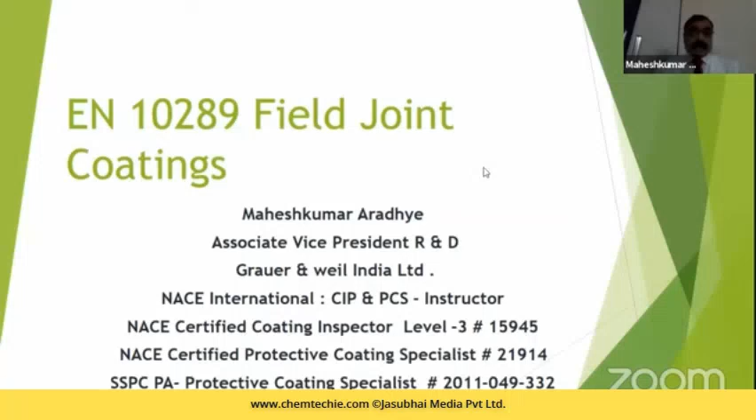maximum benefit. So let's understand in detail what ISO EN 10289 is: a specification for steel tubes and fittings for onshore and offshore pipelines.

This is specifically talking about external liquid applied epoxy and epoxy modified coatings. It's an English version of DIN EN

10289 2004, and it specifically talks about pipeline external field joint coatings.

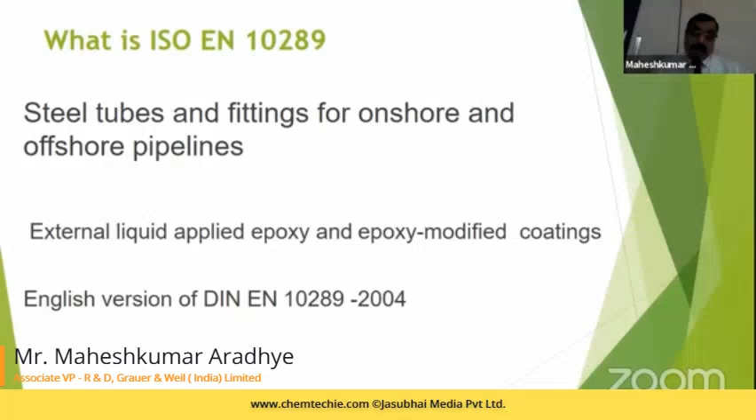When we want to talk about it, it has three different types: type 1, type 2, and type 3. Type 1 coatings are suitable up to 40 degrees C, from minus 20 degrees C to 40 degrees C.

The next, type 2, is minus 20 degrees C to 60 degrees C.

And last but not the least, type 3, which is from minus 20 degrees C to 80 degrees C of temperature. This is the design temperature as well as the actual or service temperature.

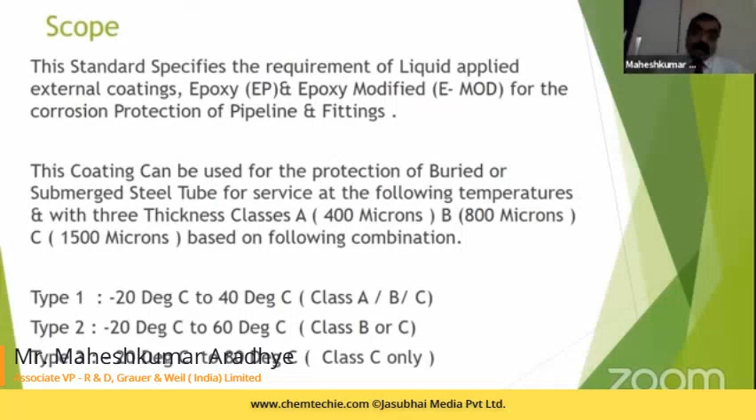These are classified in class A, B, and C. What do classes A, B, C mean? Class A calls for coating thickness up to 400 microns, class B calls for 800 microns, and class C calls for

1500 microns. The most critical parameter here is the hardness of the coating, which should be minimum 80 at that class.

You can get a hardness of say 80 at 250 microns, but that is not acceptable.

It is talking about getting the Shore hardness of minimum 80 at 1500 microns, 800 microns, or 400 microns, whenever the coating is applicable to class A, B, or C.

Now this is one of the very critical parameters. The other parameter is the holiday test.

As a rule of thumb, in normal circumstances, it is said that whenever you go

for application of holiday detection for any protective coating applied onto the surface, it is 4 volts per micron.

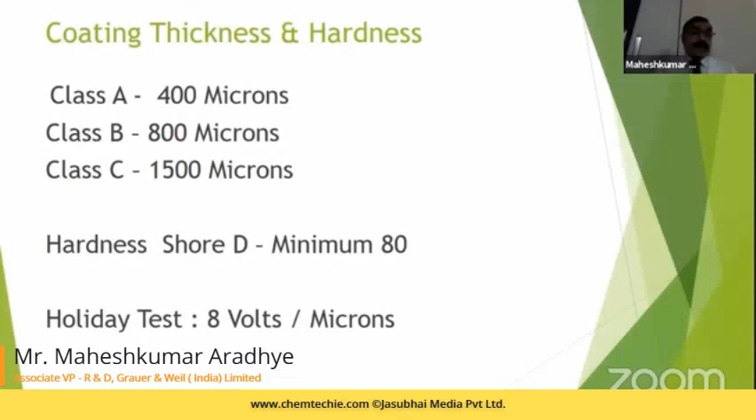Now another critical parameter is the cathodic disbondment test, which is to be carried out at the service temperature. It is not only at room temperature, but also at the service temperature.

As I already discussed, high voltage holiday detection is at 8 volts per micron.

The thermal aging, a great thermal aging cycle at 100 degrees plus or minus 2 degrees centigrade, is for 100 days. The electrical insulation

talks about surface resistance, which should always be greater than 10 raised to 4 ohms per square centimeter, which is very, very high.

It talks about the indentation requirement, which should be less than 30%. Again, this is at the service temperature, not at room temperature.

At service temperature, the indentation should be less than 30%, which is a very, very crucial requirement.

The impact resistance is again more than 5 joules.

Now, if you look at all these test parameters, the coating which you design should meet all these requirements, which clearly shows it needs a very high degree of electrical insulation.

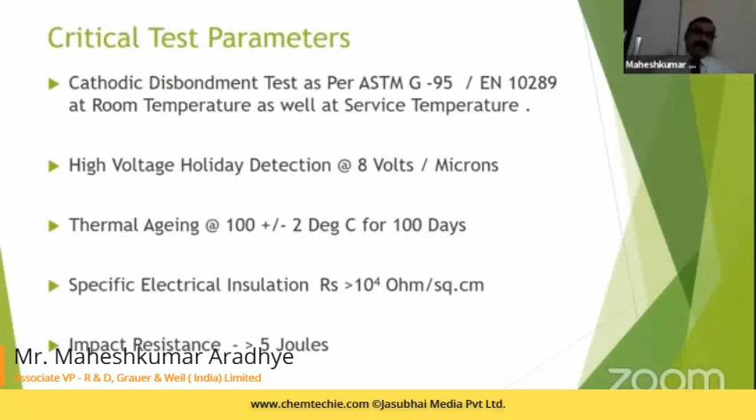of glass flake filled coatings can work in this particular specification. You have to design a coating system which meets the specification of BS EN 10289.

So where it is used onto the field joints. Now, whenever you look at a factory coated pipeline, you will see that it will be having either FBE plus 3LPE. So they will be taking in the FBE out of the coated 3LPE. Now, this is known as the FBE toe. This FBE toe should not get disturbed. The coating should have the adhesion onto the FBE as well as onto the blasted, exposed area.

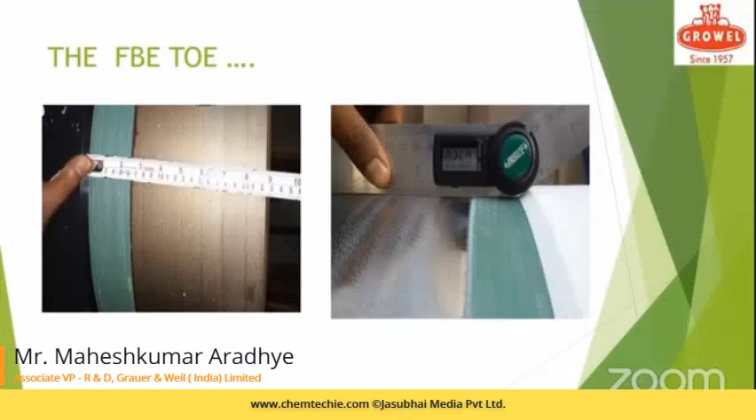So how the coating should be? Coating should be like this. If you consider that this is the pipeline, this is the FBE toe, adhesive and the topmost polyethylene tape, then the liquid epoxy should be able to get applied, which should be a junction between PE, FBE, and the base metal, which is again one of the very critical requirements.

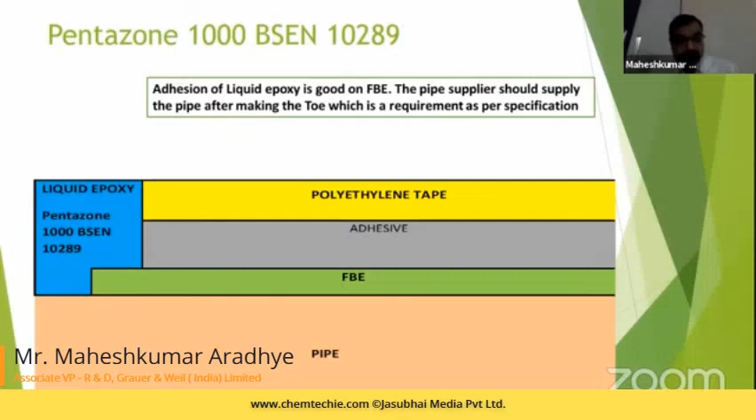And to meet this, you have to design a coating system in accordance with EN 10289. Now, this is the summary of the required properties, which talks about the dry film thickness, Shore hardness, appearance, adhesion onto the cutbacks, impact resistance, adhesion pull-off test requirements, cathodic disbondment test requirements. These are all given into BSEN 10289.

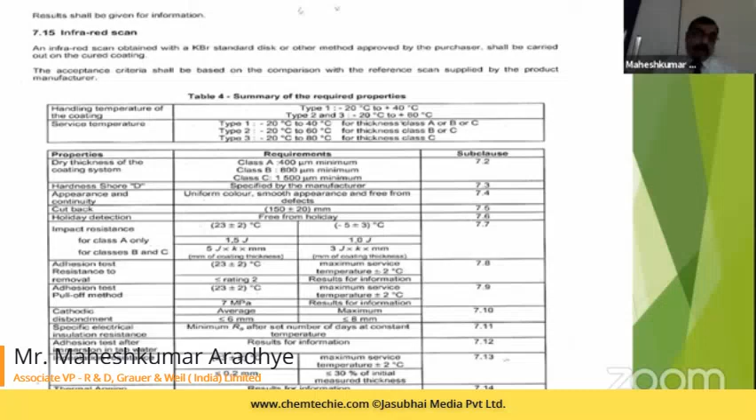So how do we say that this particular coating works onto the system? We develop a coating system as Pentazone 1000 BSEN 10289. We gave this particular name to our product Pentazone 1000. This is for the ease of understanding.

Now, this product can be applied by single leg airless spray, plural component airless spray from the thickness requirements of 400 microns to 1500 microns.

Now, as you will see that the whole pipeline here is coated with Pentazone 1000 BSEN 10289. In this case, the thickness requirement was minimum 800 microns. So Pentazone 1000 BSEN 10289 is giving the service as per the type 2 class B.

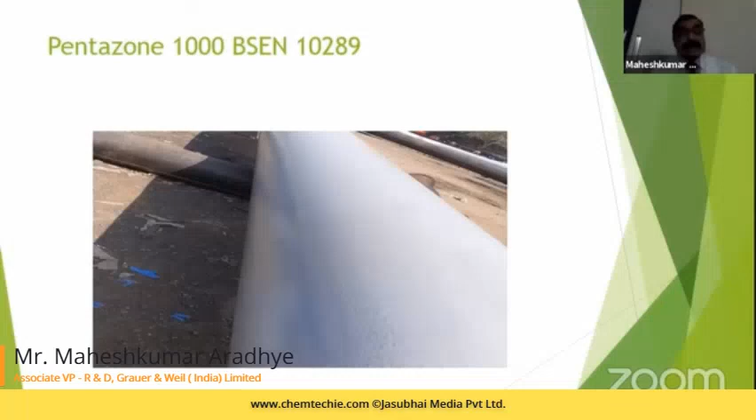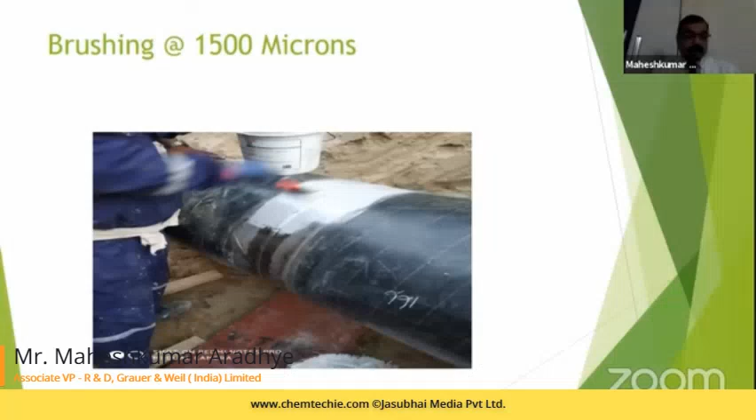Okay, so in this case, if you could see here that it is applied by brush onto the hand tool prepared surface. This is the classic example. It is hand tool prepared surface and it is being applied by brush at the thickness of 1500 microns. To achieve the coating thickness of 1500 microns, it takes hardly 20 to 25 minutes of brushing without stopping in between. You can build a thickness of about 1500 microns.

And once you build it, you can see it. It is very easily achieving the thickness and achieving the surface finish.

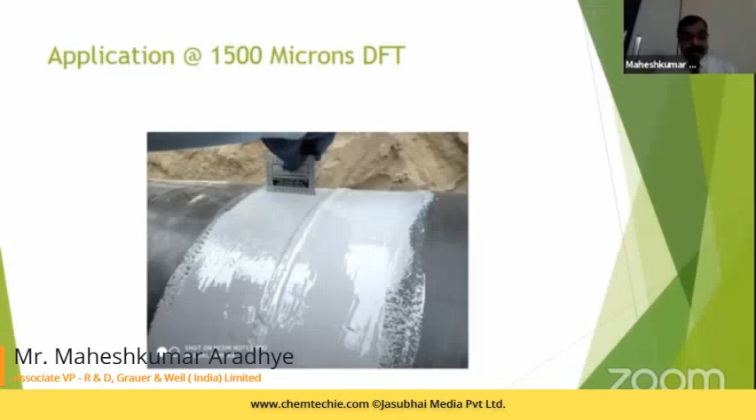Now, when you apply this particular coating, you have to undergo a critical test, also known as a holiday detection test. This holiday detection test is carried out at 15,000 volts, 15 kV. This is the specific requirement of coating which is applied at this particular thickness on the pipeline which is supposed to get protected when it is buried. Now, this particular material, Pentazone 1000 BSEN 10289, meets the characteristics of the holiday detection without any problem at 15 kilovolts. Now, I want to narrate something else.

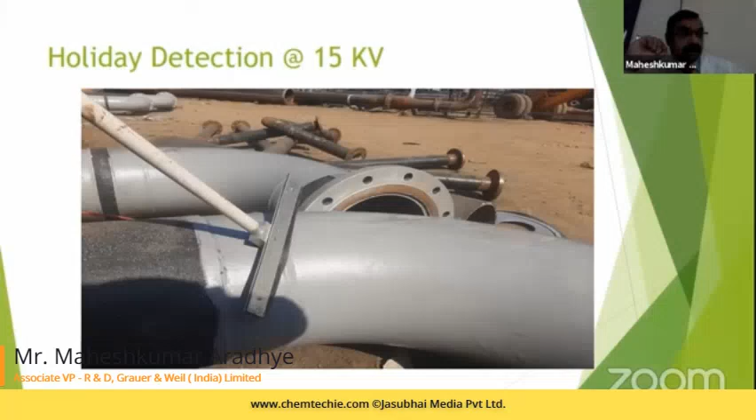If you look at the specification NACE SP0188, it talks about the holiday detection, high voltage holiday detection. Now, when you see the liquid applied coatings, the maximum voltage rating given for the thickness of 1500 microns is 6 kV. And in case of BSEN 10289, it is at 15,000 volts. 6,000 versus 15,000. So that's why I proudly take the opportunity to share the PQT which was carried out.

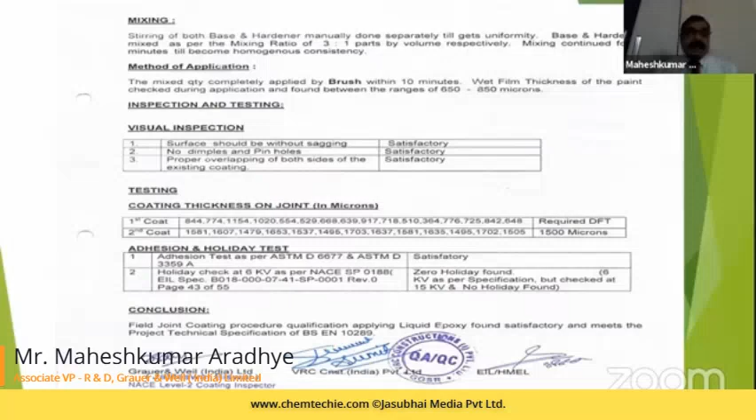Here it says that as per the specification, it has to be checked at 6 kV, checked at 15 kV, and no holiday found. And the coating was absolutely intact. This is what the coating is giving. It is giving highest performance, highest insulation. It plays a very good barrier. It is giving a very high resistance to the cathodic disbondment. It gives a very good resistance to any kind of corrosion elements to pass through.

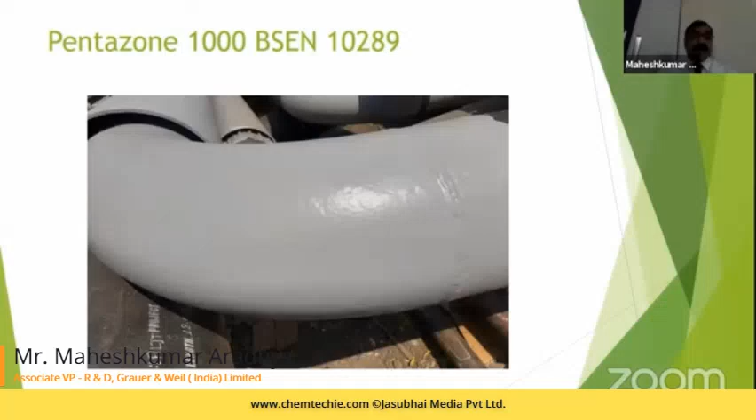Then people will say that why is this coating performing? Is it performing only onto the good prepared surface? My answer would be yes, it is performing onto the good prepared surface as well as it is performing onto the pitted surface also. This pipeline is from NTEPCL at Chennai, and this was coated with our Pentazone 1000 BSEN 10289. It was coated in the year 2018, and very recently, the corrosion audit was carried out by me, and we found each and every pipeline is 100% intact.

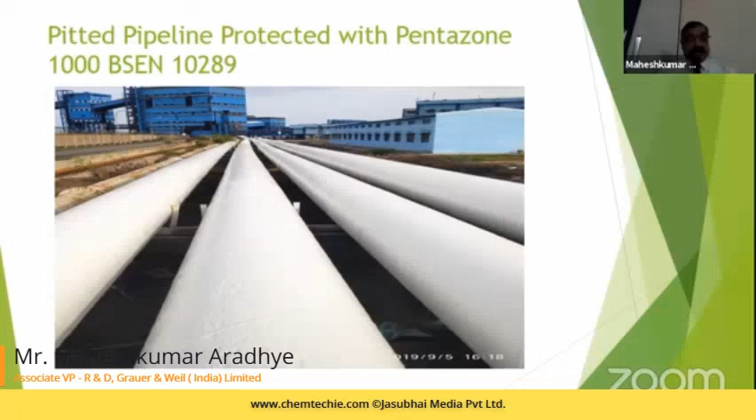The atmospheric condition here is CX, that is more than C5M, CX, C extreme as per ISO 12944 part 2 environmental classification, and it is performing in this particular area with very, very good performance.

People ask why I insist on epoxies and not PU for BSEN 10289. The answer is epoxies can give you the highest bonding, more than 2500 psi. It can be made internally flexibilized - you can modify epoxy and make it internally flexibilized. But you can't modify polyurethanes and make it internally hard. It's impossible to make polyurethane hard coatings with hardness more than 70.

You can have greater flexibility in application - you can apply it by brush, by single leg airless, or by plural component. You have a lot of choice. You get hardness above 80 Shore D, and a very high cross-linking density, which gives you in turn very high corrosion resistance as well as temperature resistance. In case of polyurethanes, the cross-linking density is much less, and that's why it fails as temperature increases.

So it's the most suitable coating in Indian climatic conditions because it has a high pot life - almost 30 minutes at 40 degrees C, which is a huge pot life, and in that time you'll be able to cover most of the pipelines. As far as polyurethane is concerned, as you go on increasing its hardness, its pot life gets shorter and shorter - it could be something like 60 to 90 seconds when it gives you a hardness of say 70 Shore D.

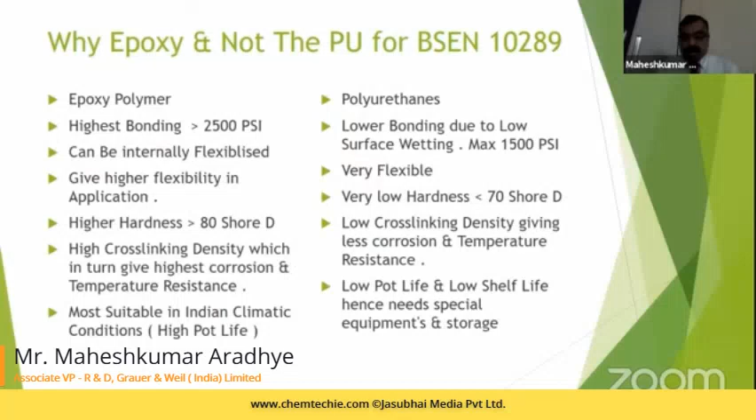Now let's talk about the Pentazone 1000, and what is the technology behind it. The technology behind it is moisture displacement technology.

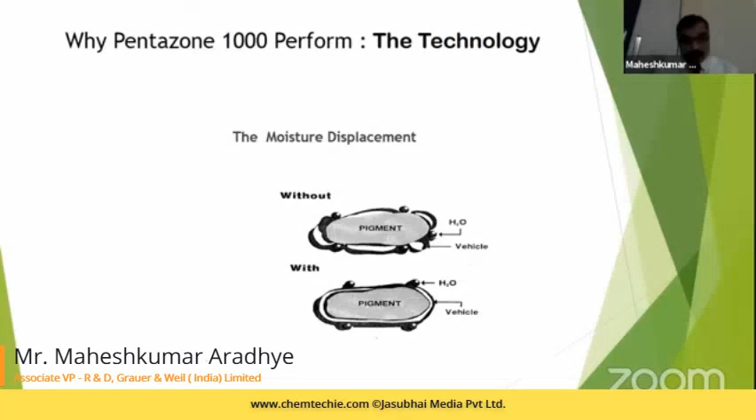Moisture displacement technology - if I want to explain it to a layman, I'd say: if you have oil on your hands, you won't be able to wash it off with just water. So what do you do? You take soap, apply it on your hands, and then your hand will be able to get washed off with a slight amount of soap and a slight amount of water. Why does this work? Because the water is then able to wet your hand properly - with oil on it, water won't be able to wet it.

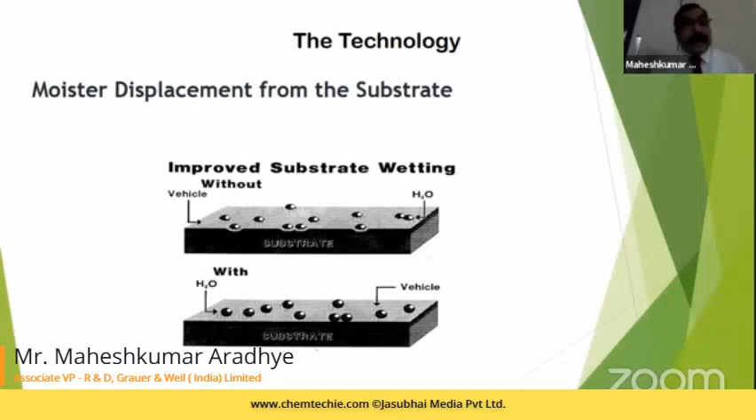In a similar way, if water is on a surface, the coating won't be able to wet that surface. So what do we do? We add an additive for moisture displacement from the substrate. That particular additive reacts with the surface and displaces the water from the substrate. I think if I just explain this with a slide it may not give you the correct understanding.

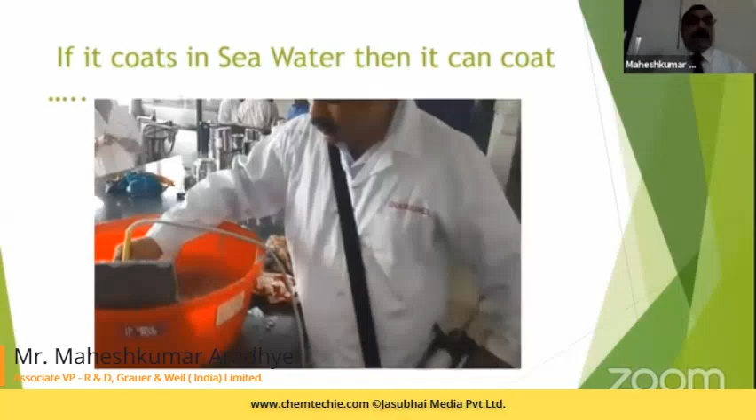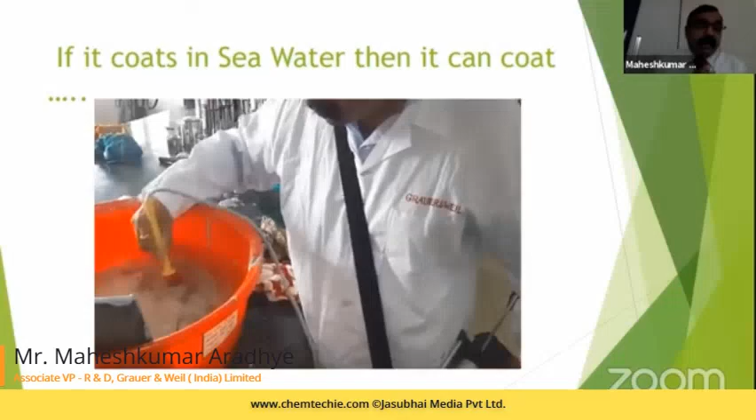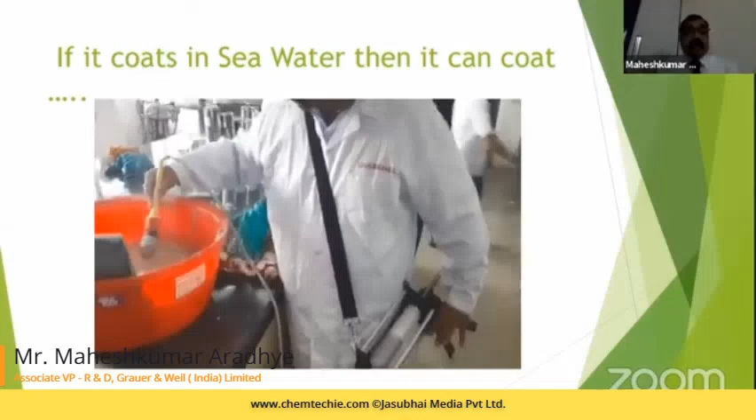Let's have a look at how it displaces moisture and gets applied onto the surface. You can see here I'm applying this coating in seawater. There is an abundance of water, and in this water I'm able to reach the substrate with the help of plural component equipment, and apply the coating very easily without any problem onto the substrate, even though a whole lot of water - and seawater at that - is present. Now just tell me, if it can coat in seawater, then it can coat any substrate anywhere.

That's the reason we say that our coating can be giving you a very good adhesion onto the surfaces which are power tool clean. I will explain which power tools that you need to have.

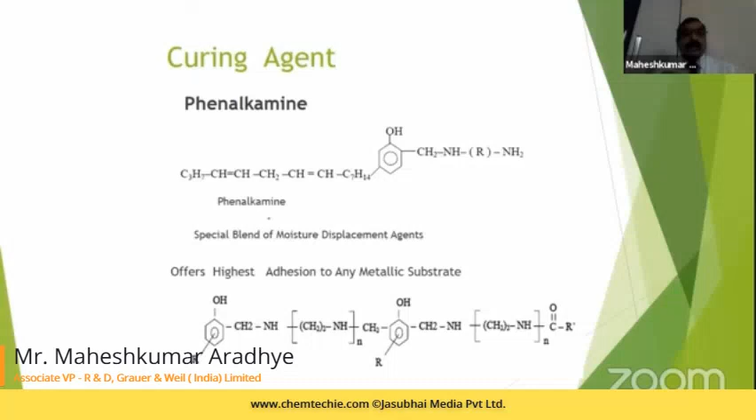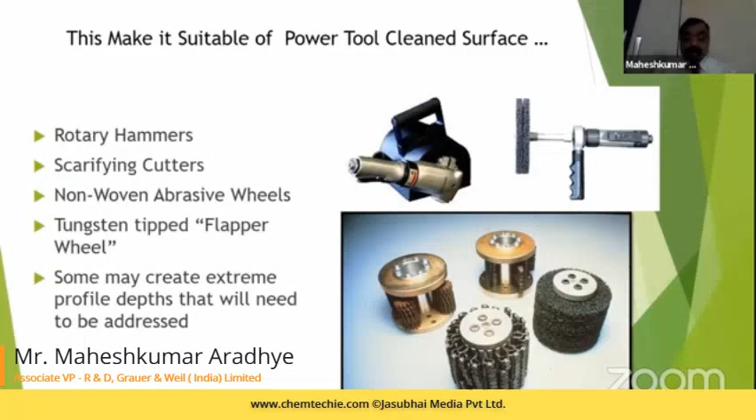Why do we say that our coating is suitable with power tool cleaning? We recommend power tool cleaning with such tools as hammers, scarifiers, non-woven abrasive wheels. It can clean the surface and create a good profile depth, along with the bristle blaster, and you can get very good surfaces that can be taken care of for services up to 20, 25 years of service expectation.

This bristle blaster can give you a clean surface as well as the anchor pattern, so that is more than enough for us.

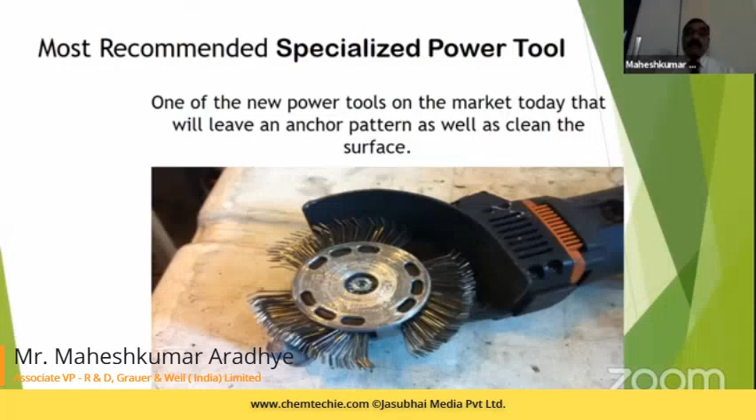What are the great features of BSEN 10289? That is Pentazone 1000, BSEN 10289. It has got absolutely zero VOC. It is solventless. It is made as per BSEN 10289, and it is extensively tested and approved by recognized worldwide standards.

It is suitable for application by any type of equipment. It can be applied by brush, by single leg airless, by plural component airless. It has got single coat applicability, so it is almost reducing the installation cost.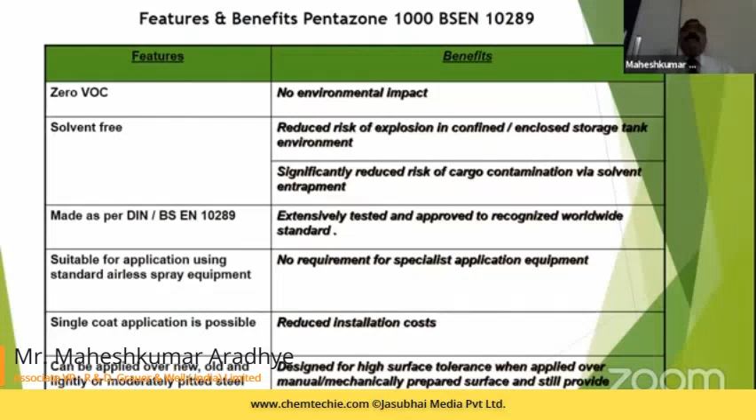It can be applied onto the power tool cleaned surfaces, and when I'm saying power tool cleaned surfaces, it should be prepared to SSPC SP 15 at least, with some profile, so you will get a proper adhesion. And why we say this is very suitable, because it is extensively tested in our lab with EIS.

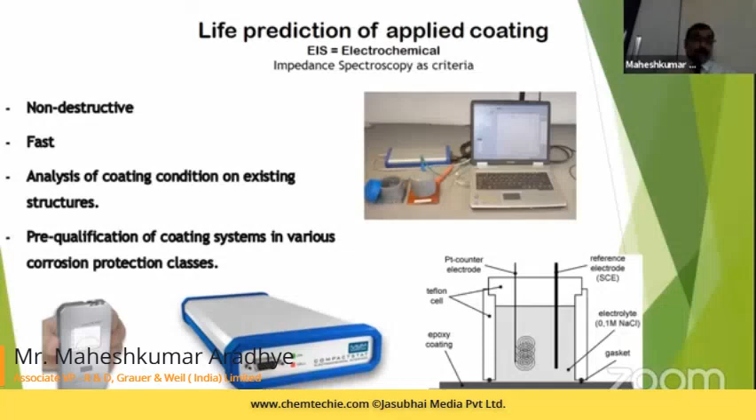EIS is a fast, non-destructive method which can give the pre-qualification of the coating system across various corrosion protection classes. It gives you the results in RC, Y0, and the N value, which represent the water ingress.

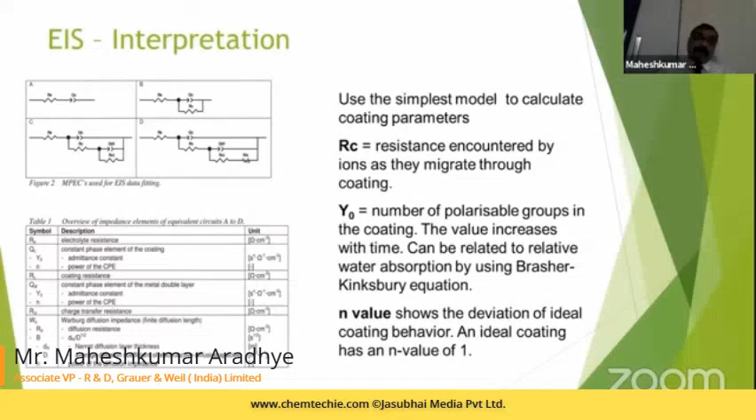So when we talk about this, the first and most important thing that comes to mind is the conditions after testing with EIS. So let's have the interpretation here. If the RC is greater than 10 raised to 8 ohms per centimeter square, then it is going to be a good protection.

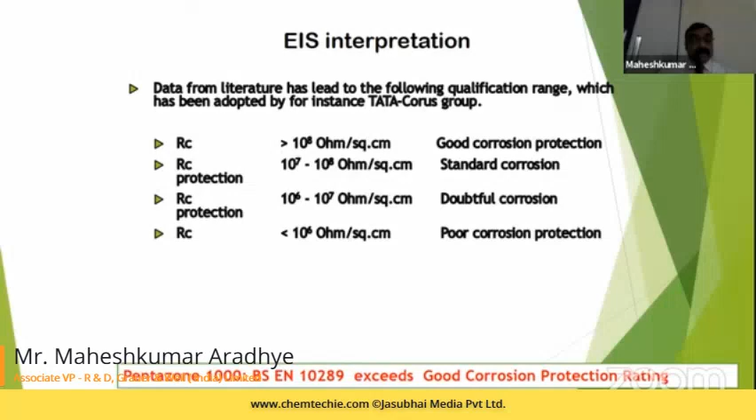If it is 10 raised to 7 to 10 raised to 8 ohms per square centimeter, it is standard protection. If it is going to go below 10 raised to 6 ohms per square centimeter, then it is going to be poor surface protection, poor corrosion protection.

Now here is the list we have got. We have got an RC value of 7.59 into 10 raised to 8 ohm per square centimeter, which is absolutely very high. The N value is 0.9, which is ideal if you are considering a material exposed to the soil. For soil corrosion, it is one of the best values.

It has got a relative water intake which is less than 0.1 micrograms per centimeter square. So it is going to give you the best performance.

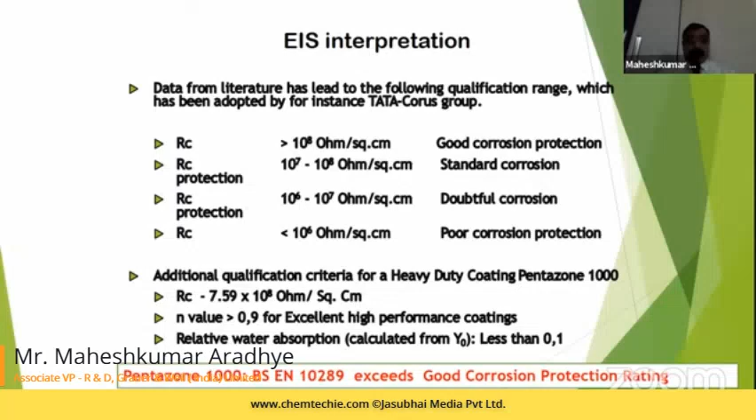So I would like to say thank you much for your attention.

BSEN 10289 is one of the best developments carried out by Grauer and Weil, and it is for the protection of field joints, able to take care of field joints for not less than 15 to 25 years of life expectancy. 15 years when applied onto the hand tool or power tool cleaned substrate, and 25 years when applied onto a blast clean surface.